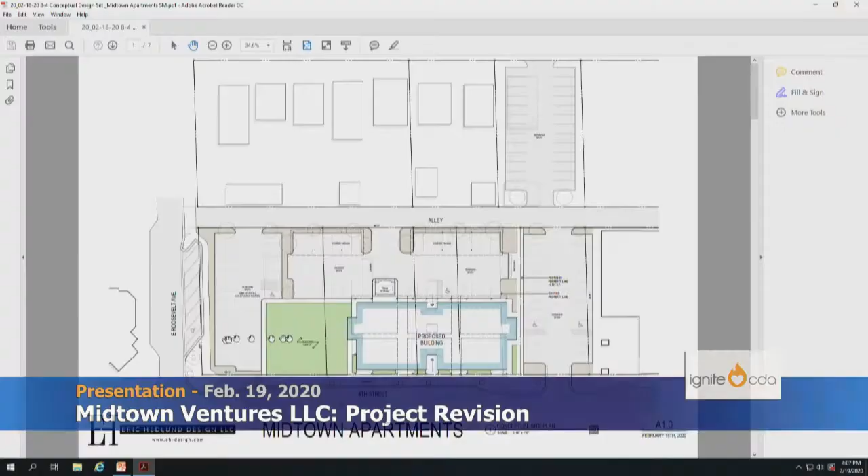Hi. Well, this is our fourth or fifth turnaround of this project, and I think we've done a pretty good job of representing what John wants and what Midtown wants. We've now gone from a four-story building down to a three-story building. We moved the park over from the corner, and it's larger than it was before, so we're almost at 5,000 square feet.

We have created 20 parking spots with the one handicap that legally should be there right now to accommodate the junk building that's there at 811. So we kept that there, primarily for use during the day for the park.

One goal we want to do is address that parking lot, which right now has no softscapes whatsoever—it's all just asphalt and concrete. So we created a buffer here to put in some landscape, some trees, and buffer it from the residential parking. The current square footage is around 6,000 square feet for the parking lot. The new parking lot would be 6,800 square feet, so it's actually larger than now.

Behind the building right now there's no parking—it's been posted no parking, never parking behind the building. So we just left that out. If you look behind the building right now, it is posted no parking. So all of our residential parking is behind the building.

We have 33 spots. We're only required to have 24. We have 24 units with a possible 2 additional units on the main floor that could be used as a manager's office or something like that. John's still trying to decide how we're going to do that.

The building is still now much smaller. We tried to create it so it still didn't look like one massive building. Forgive me, I'm not using windows right out this way.

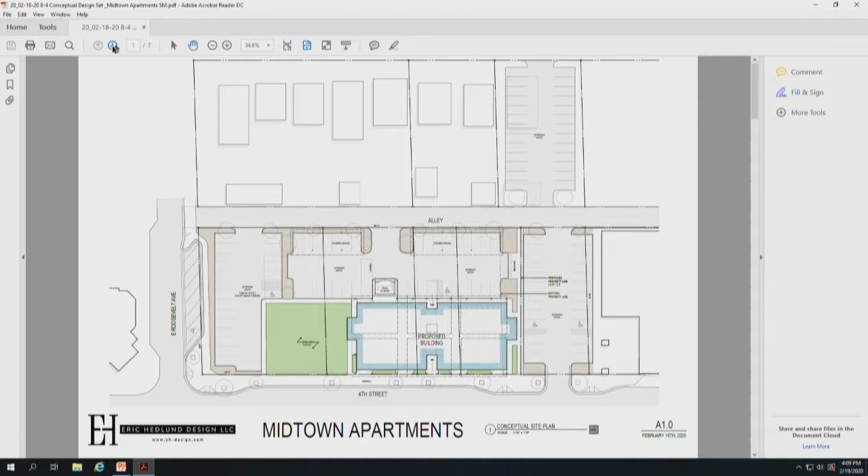So right now, currently, we have all the commercial storefront on both sides facing 4th Street, with possible 2 restrooms that could be used for all the commercial, or not be built at all. We wanted to create storage units for tenants, so bikes weren't all left outside and stuff on their decks, so it didn't become an eyesore from the street.

These are those 2, you can see them faint right here, 2 possible 1-bedroom units for manager units. Because we think it's going to be a very popular location and rental.

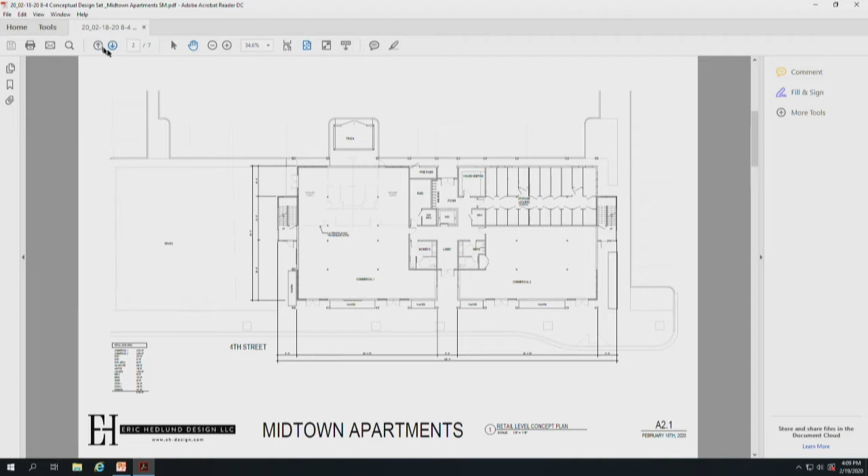And then we go up to the residential, and we have 12 units per floor, still with the elevator. All the units have a terrace except for 2 on each floor.

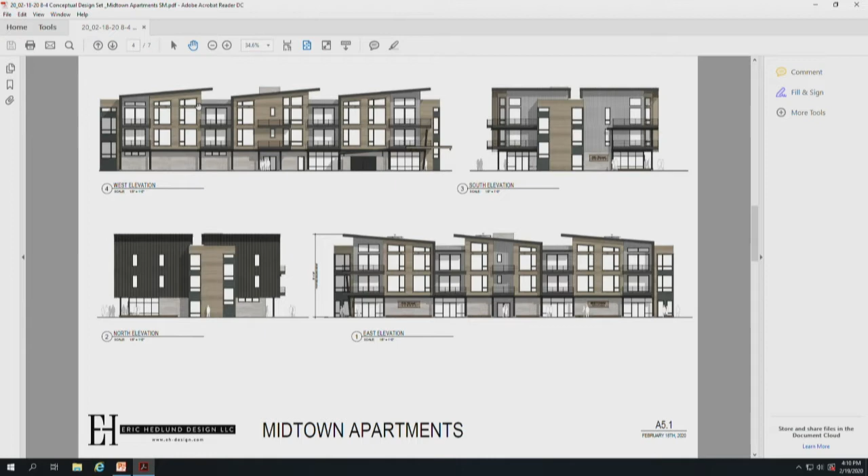So Nate and I created this building to try to make it look like 3 different buildings versus one large building. And as John has mentioned, the process has been a little more expensive to construct, so we tried to efficiently redo the structure so it's a little easier to build.

This is kind of like from our office looking directly at the building, where the green space is still out front. I think you'll see minimal parking compared to now.

And then again, straight across the street. So it came down—it's approximately 6 to 8 feet below the height limit now, instead of being over the height limit.

And then this is obviously looking back down south from 4th Street. Or on the backside, looking down north, I guess, northeast.

So I think we've accommodated everything. The Midtown folks came in and met with somebody in my office and said they much preferred this plan over the previous one in scale and location. We haven't heard anything else from them, so I think we've accommodated everything that everybody wanted.

I don't know if you guys, that's, a question?

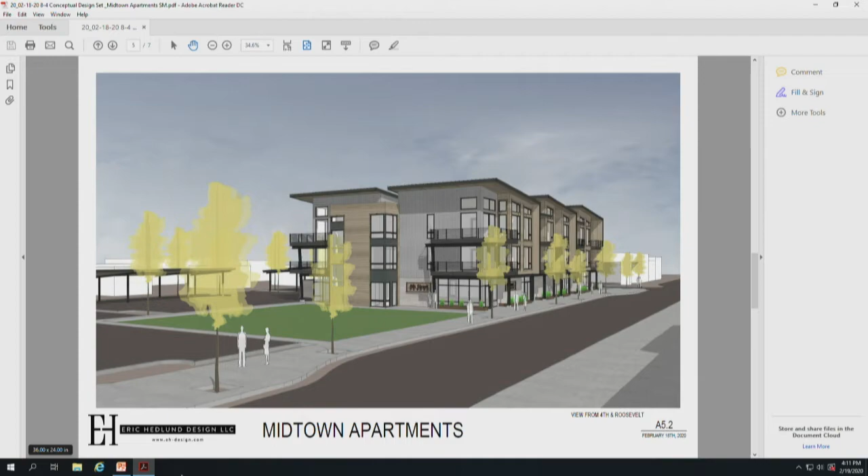What efforts did you make to reach out to the stakeholders besides inviting them to the office? I sent probably, I don't know, 10 emails asking if they wanted to come in, and really never got a response until a couple weeks ago when they said they were putting a letter together. I never received it. And then Art stopped into our office, and that's the only communication we've had besides a few negative emails from the previous taller version.

How many attended the office presentation there? Nobody ever—they never said they wanted to come in for a presentation. No one came into the Midtown, to your offices to view this?

I think, I wasn't here, you were here, Nate? Yeah, I can speak. I was in the office the day they came in. Basically, when we went in, we talked to Art.

About scheduling a meeting—Art, you have to come up to the microphone, please. Excuse me, I came in and met with... Wait a second.

I came in and met with the design staff, and we were putting together a meeting, but at that first meeting, they said they were redesigning it. So until they had a fixed design, we decided not to hold an open house or a meeting with them. We held off until tonight's presentation because the design parameters have radically changed over the three designs, from a building set far to the south, to a few yards to the north, and now significantly off the junk store property.

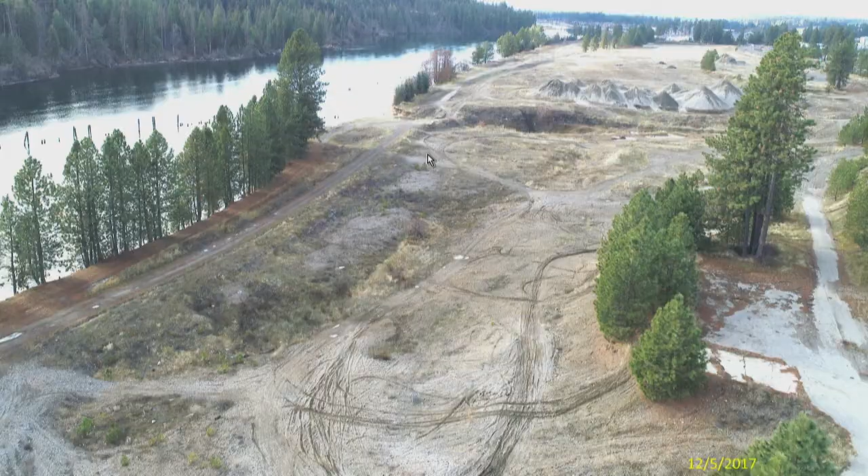So it's a boulder type material that's more stable. To Commissioner Arman's question, Area 13 is right down in here.

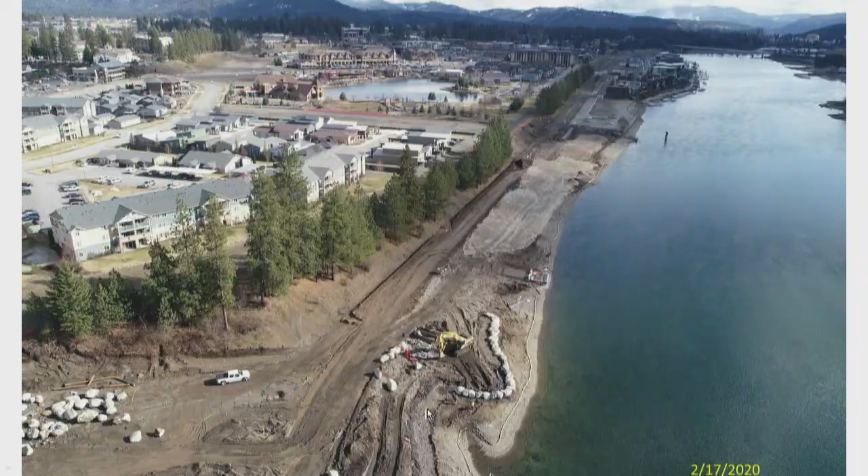This is construction of the rockery wall, and you can see the magnitude of the effort here. These are really substantially sized materials. This area is completed, so these are stream bed gravels, and this is the backfill that goes into the area. This will eventually get bladed back and there'll be plantings put in here. The excavator is sitting essentially where the walking trail will be.

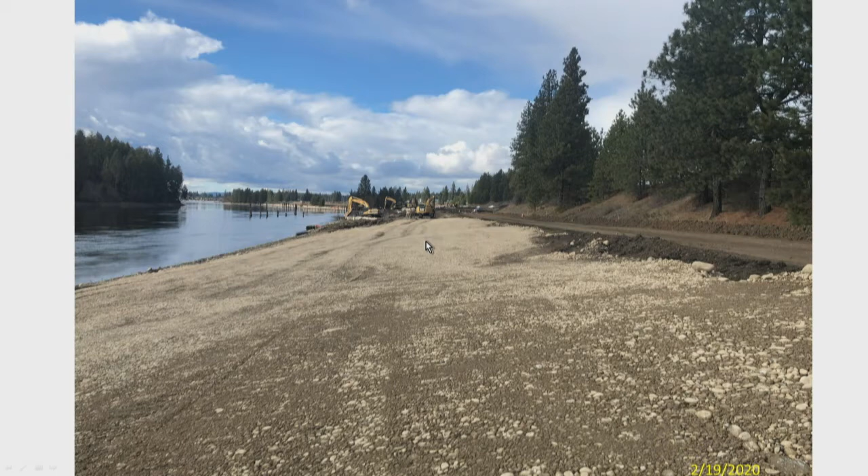This is a shot looking back on the beach. If you folks remember what this used to look like, it was covered with bushes, and the concept was just to restore what it was there originally. This is the old railroad grade here. And the beach area, there'll be picnic areas in each one of these areas, and then the shared use path through there. You can see in the distance they're setting the rockery wall.

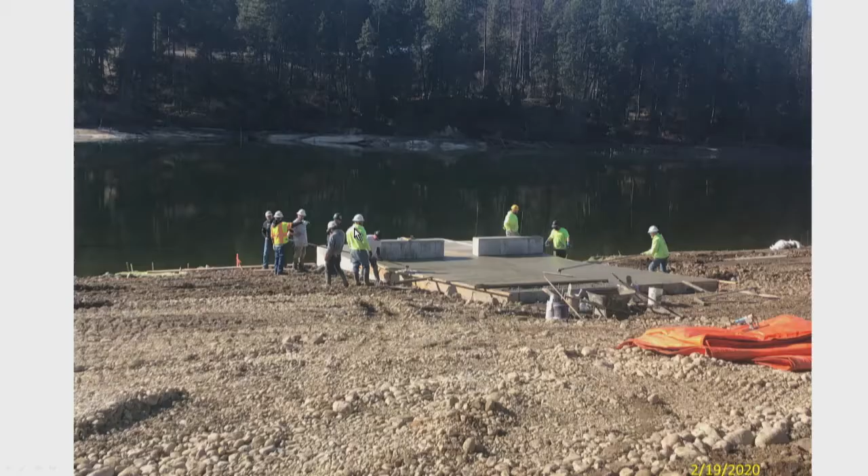Sorry to interrupt, but while you're there, where would summer level be roughly in there? It would be right about down there, so there's quite a distance in here. This won't all remain beach, because it's a lot of beach. We've been looking at this with Bill a little bit, that there might be some thought about putting in some actual turf in here, maybe not mowable turf, but something to soften the space up. There'll also be trees along in here, because otherwise it's just this big southern exposure that will get extremely hot in the summertime and not be friendly for folks to sit out there. But that's a deep beach, about 80, 90 feet right there.

Would you anticipate any finer material there, or is it going to be that fairly coarse stuff? The trick there is we would like to put finer material in there, but we're worried about it just ending up in the river because of the flow that goes through there. What we are going to do is run a tine through there to fluff it up a little bit. We compacted it because that's what stabilizes everything underneath. We'll run a tine through there, fluff it up, and then they'll pick out the big rocks in it, so probably things bigger than 6 inches will come out.

But it's a challenge to size the material in there. The coastal engineer who worked on this did what's called a hydrodynamic analysis to size the material. That was our first reaction too - it was very big, and he said, well, the science says that's how big it is. If you want to put in smaller material, you take ownership of that, and I don't want to own the beach disappearing.

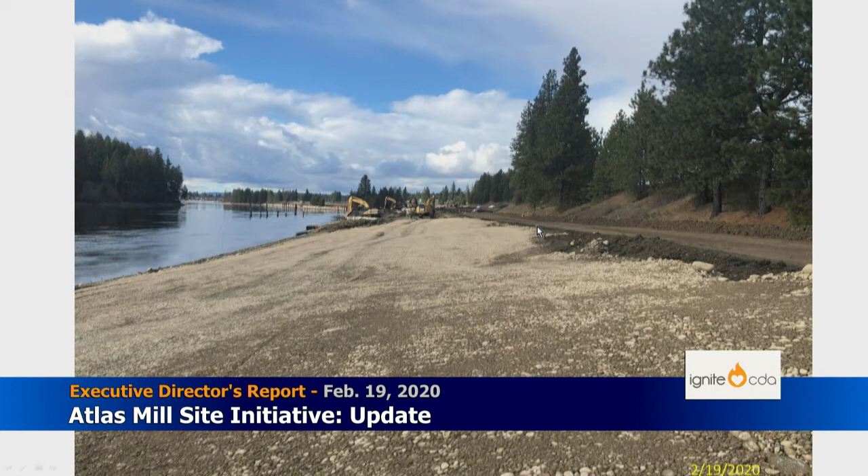Is it possible to put a sandier area further away from the river so it doesn't wash down? It's interesting you say that - we talked to Bill a little bit about that, and he's thinking about it. When the river comes up during flood stage, you can actually get water up into this area. The 100-year flood is somewhere up in here, and so you get these recurrence intervals.

Does Bill want to be in the business of replacing the beach every so often? Again, that becomes a maintenance issue and expense for him, and he's reluctant to take on those expenses because of his budget situation.

So is this on the tour tomorrow? Yes, everything you see is here. Yeah, it'd be interesting to look at that.

This is the swim launch - they were actually placing the concrete today. To give you your bearings, there'll be a trail that comes down here, so if you were in a wheelchair, you could come down. This has a very slight grade to it, though you can't see it very much in this picture, and then it gets into this point.

You're in about 8 to 12 inches of water here. On the other side of that wall, you're in 2 feet of water.

When Bill and I met with folks from the disabled community, we heard a variety of things - some folks want to be able to wheel into the water, some want to be able to wheel to a transfer wall. If you've been to some public pools, they have what's called a transfer wall, so you can wheel up and transfer yourself to it. There's grips on it, and then you can transfer yourself into a couple feet of water, get out here, and transfer into deeper water.

If you wanted to wheel all the way into the water, you could continue on down there - there'll be rails on here, so you can wheel yourself down, and if you want to come back out, you grab hold of the rails and pull yourself out. There's also a rail along the end that would stop you from continuing off the end of it.

Wrong direction - this is just another shot of them placing the concrete.

That's it, glad to answer any questions. As I think most of you know, there were those that couldn't make it. We're going to tour the site tomorrow while it's sunny and be able to see some more of this.

Is there any way to look at right now how you're coming in compared to budget? Excellent question - we're below budget. Good, excellent answer.

We encountered unsuitable soils, back to these pictures here, where we anticipated encountering some of them. It's really difficult to estimate what that quantity is. So we had put a budget in, but we've encountered way more than we had anticipated, and of course they were in the worst of areas. Some of it was at the end of this parking lot right here, and other parts were right in this area where the road goes through.

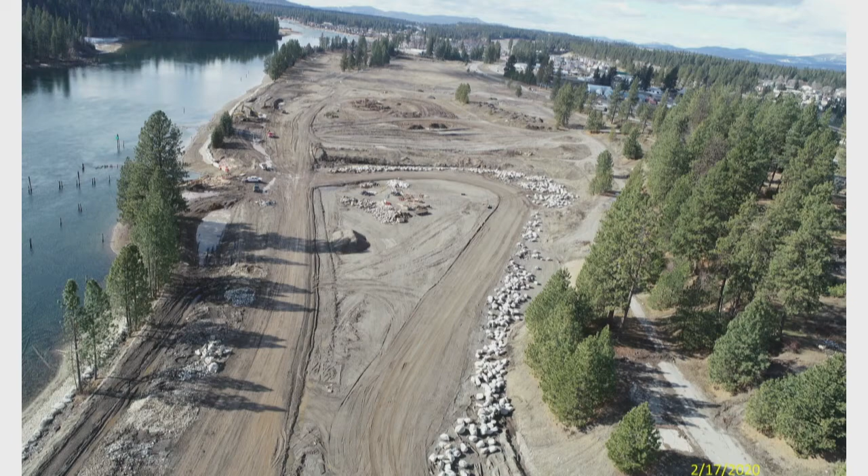So we were going way over budget for those line items, but I think the board remembers La Riviere had offered to start processing on-site materials, both the topsoil and the material you're seeing here. So we worked through those numbers with La Riviere and saved a tremendous amount of money. On their original contract, we're about $50,000 under. Overall, the project is $150,000 under the budget the board had set.

We think we've encountered most of the unknown conditions, because once you get out of the ground, moving forward we don't anticipate seeing a bunch of other things. So talking with Bill, if there's opportunity to add more landscaping - that was one of the features we were cutting pretty tight and thin to keep the project within budget.

But now, as we're getting towards the end, we may be back to Ignite saying we're under your original budget, and we would like you to consider allowing us to spend some of it on landscaping, because that's where we had - I don't want to say shortchanged it - but really put the least amount of investment in the park area.

How's the mining going on Atlas Bluff? It's going good, we've stopped for the most part because we've made enough topsoil material. We've been working with Steve Gillett, who's a partner of the city with DEQ with his brownfield money. He's doing some testing on the soils for metals content.

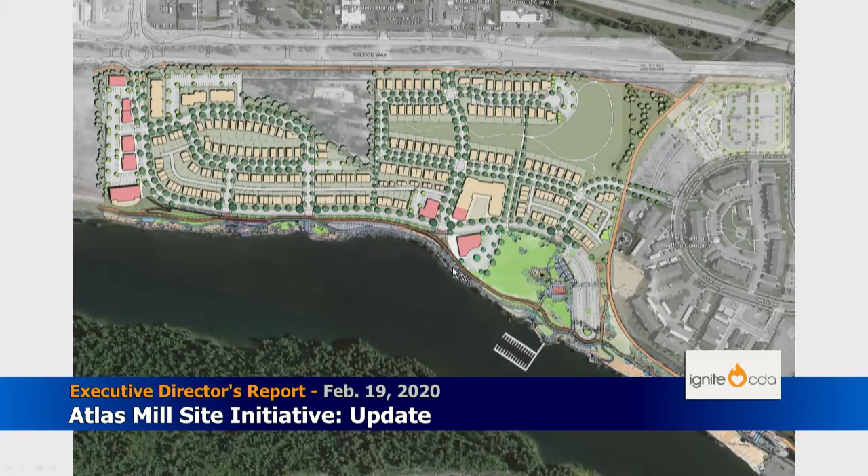I could see what would happen if you moved it a little further northwest, in this area. Yeah, so it's wider there, and you've got that little cove up there. If you went up there, you might have a little wider space in the river.

Part of the idea of locating it here was proximity to the restrooms. And also, sometimes these places become loading spots for friends and family. You might launch your boat, and then it's a challenge for friends to park there. Like Higgins Point, it fills up, so folks launch their boat there, then go pick up friends somewhere along Coeur d'Alene Lake Drive, or go into town where there's more parking.

I'm just thinking, if the concern is narrowing the channel, put it in a wider spot up there, and it would probably be less of a concern. Yeah, that would add some benefit too, back to the earlier point about Area 13 here. And you're still right on the park area there, too. Yeah, you'd wander down the trail and come to here.

Just a thought. Well, maybe the long lead item for making those decisions is the encroachment permit. So maybe what I'll do is speak with Bill about moving forward with the encroachment permit. We've done encroachment permits for all the other facilities here, so it's not a heavy lift to put that together, and size a dock that might be less than $200,000, then move forward with getting the permit. I'd think any kind of dock would be next year. There's no way a dock would go in this year, probably not unless you found one already for sale, there wouldn't be time to have a dock company build it.

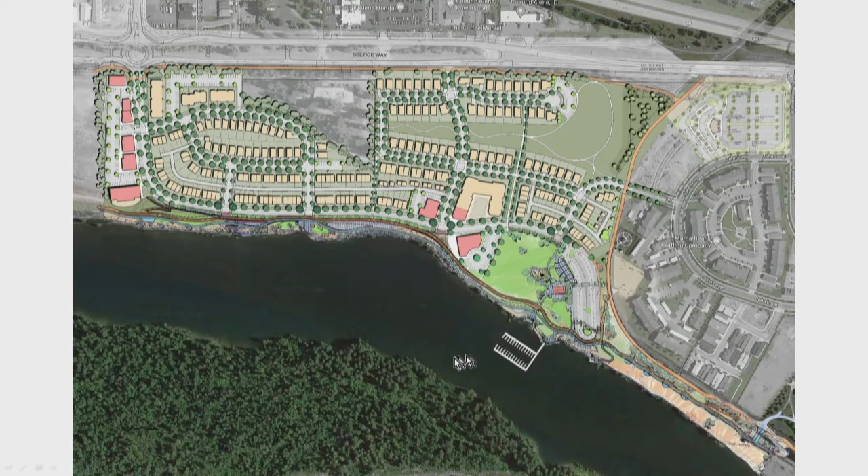It didn't seem like that pump was that big of a return when you figure the cost of the pump. It was, maybe in 6 or 7 years it pays back. It was down the road. Yeah, their irrigation bill, and again I'm kind of going from memory, is something like, I think we've estimated it at like $40-some thousand a year here potentially.

Further questions or comments? I guess we'll talk about the dock down the road when we see some more numbers, right? Yeah, and what we'll do is, as we're getting a little more refined here, this is helpful for me to go back and talk to Bill and talk with Tony about it. It gives us a little bit of direction where the board might be thinking about, and we can start putting some ideas, a menu together for you guys to think about. Thanks, Phil. Okay, thank you, Phil.